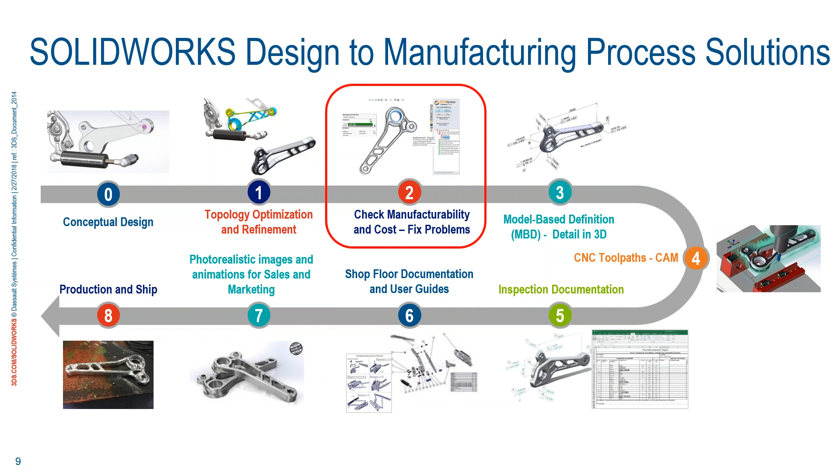So today, though, we're going to focus mainly in this area, checking manufacturability, cost, and fixing manufacturing problems on your part. So tools that help you to do this. So let's get right into first, why is DFM important? So DFM, Design for Manufacturing tools, let you check manufacturability of your product. So you can design products that are less costly, better quality, and you can get there faster. Also, it helps you to catch manufacturing problems early so you can fix them in the design phase where it's cheaper, before it gets to manufacturing, or even worse, if it gets out to the customer.

Third, it improves communication between design and manufacturing. So rather than just throwing it over the fence to manufacturing, now you have direct manufacturing input as you're designing. And fourth, it captures best manufacturing practices so that designers, people who are building the parts, can actually see the information real time as they're designing the part. So the feedback is instantaneous.

So we're going to discuss a bunch of different products today, but we're going to mainly focus on two products, DFM Express, which is inside SolidWorks, and also DFMPro for SolidWorks, which is actually a partner product. So let's start with DFM Express. So DFM Express is included with all SolidWorks licenses today, all right?

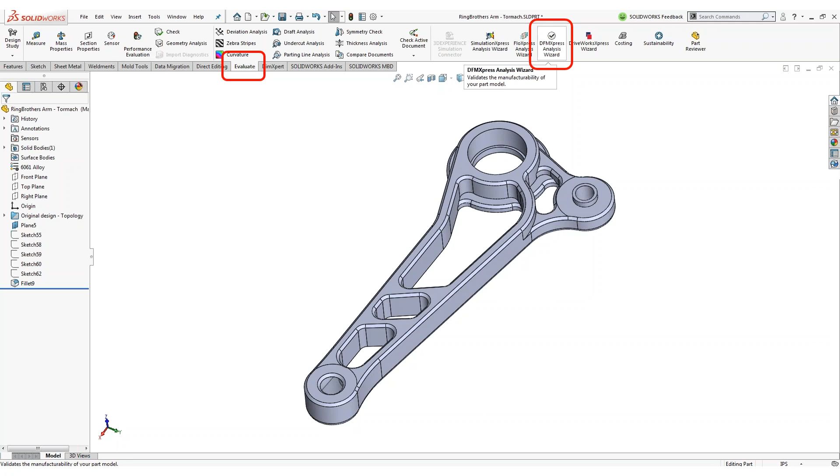And the way you access it is if you're on the Command Manager, you see the Evaluate tab, and you would see DFM Express Analysis Wizard. The other way you can get there is by Tools, Express Products, DFM Express. Now, one thing that came up in the first session, you have to be in part mode to do this, all right? This is something that we analyze parts. So if you're in assembly mode or if there's nothing on the screen, you're not going to be able to see the DFMXpress selections. All right, so that's how you get there.

So DFM Express, when you fire it up, this is what it looks like. It fires up in the task pane. And the first thing you want to do is go to Settings. So under Settings, you can select what process you want to use, and you can modify the settings for those specific processes. So mill drill or mill turn or sheet metal or injection molding. These are all the processes that are available in DFM Express. Each one of them has settings that you can modify on the side here.

Now these settings are in the software. They're sticky, but you can't save them and let somebody else use them. They're just for your use. In other words, you set the value and it stays sticky. The next time you open the file, those same values are in there, all right?

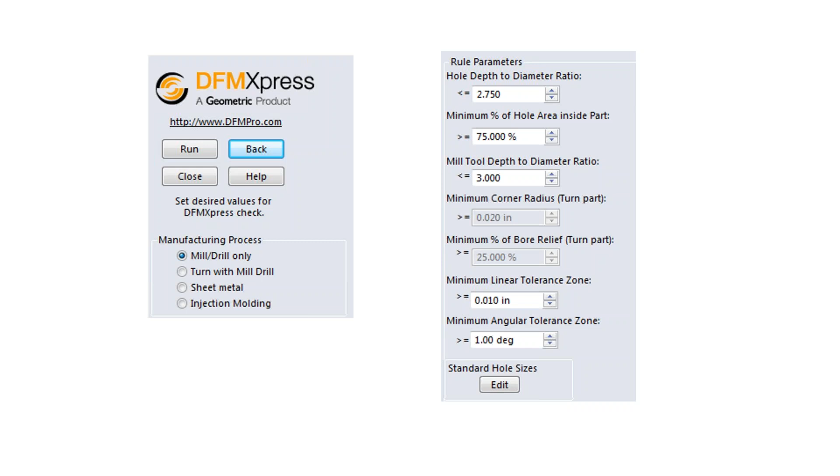So now when you want to run the software, hit the run button after you do your settings, and what comes out as a result is basically a set of rules that get checked, all right? If the rules show up in green, you're good to go. That means your part passed. If you see red X's, that means these are things you should investigate. Now, it might not be something wrong with your part. It's just giving you a warning that it's advising you, hey, you may not want to do this, or this is not advisable to do this.

So for instance here, I had fillets on the outside of my part, on the outside edge. Now I'm milling this part. So I know if I'm milling that part and I've got fillets on the outside, it's going to take a little while longer to mill a fillet than it is just to either leave a sharp edge or to machine a chamfer, which would be like one pass, okay? So it's giving you recommendations. Hey, there might be a better way to do this. You've got fillets on the outside. They can be difficult to manufacture, which means they could be costly.

So there were a lot of other checks that it ran. For instance, it ran checks on standard hole sizes. That's very common. Hole depth to diameter of cutting tools. That's a common thing. You don't want your cutting tools to be very skinny and to be going deep because they might break off or they might wander inside the part. And there are other checks such as, are the features machinable? Can they be reached to be machined?

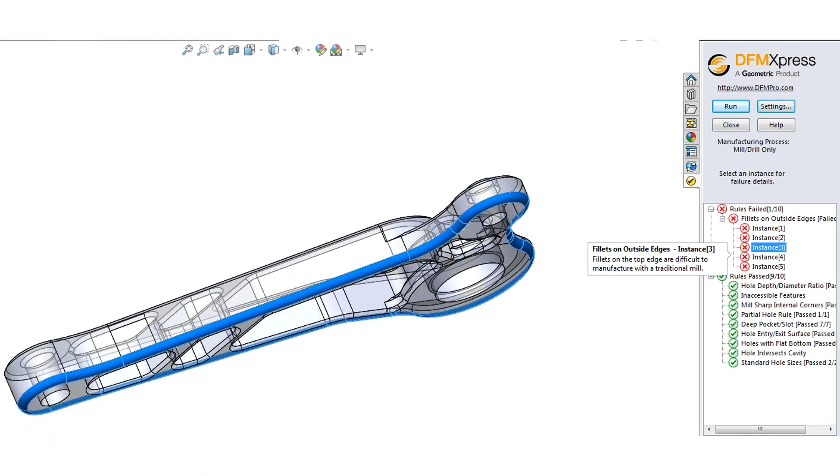So there's all these checks, it's kind of like spell checker or a grammar checker for Word, right? So it's a very easy to use tool. It's very easy to set it up. And it's just a great way to check your part before you go to manufacturing. Now, there is a more sophisticated product with more types of analyses, more collaboration tools that come with it. That product is called DFM Pro for SolidWorks, and that's actually offered by one of our partners, HCL. So with that, I'm going to let Pranav give a little talk about DFM Pro for SolidWorks.

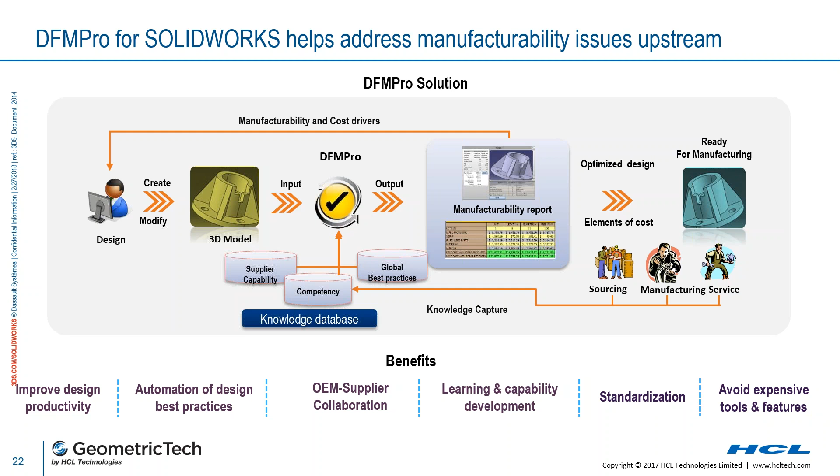Next slide, Craig. So what does DFM Pro contain? As we have seen, DFM Express has a few rules for mill turn, sheet metal, and injection molding. DFM Pro expands the scope of DFM Express and takes it to another level where you get access to hundreds of DFM rules for various processes like injection molding, sheet metal, and assembly.

You can perform various assembly checks, casting, machining. It can also perform additive manufacturing analysis, then turning, welding, tubing, and so on. So all the common, typically used manufacturing processes are supported with DFM Pro. Next slide, Craig.

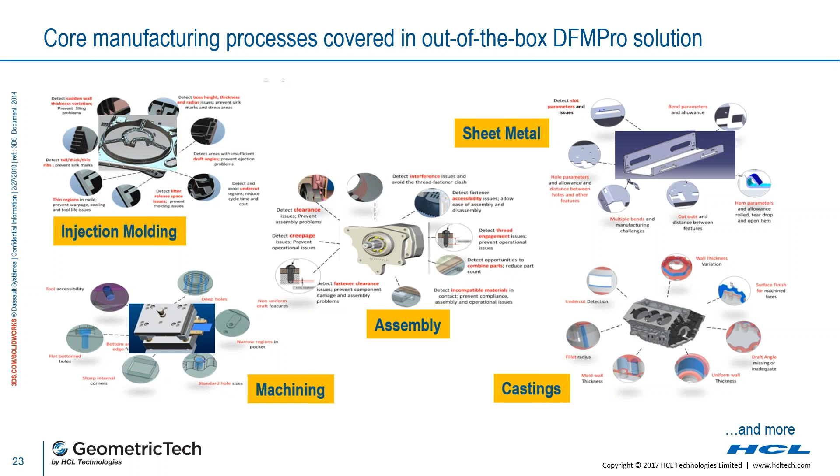Now you get the recommendations inside SolidWorks. And again, these recommendations are just there as an assistant to the designer. You have no obligation to make the changes as per the recommendations, because many times your design features are required from a functional point of view. But DFM highlights them anyway from a manufacturability aspect.

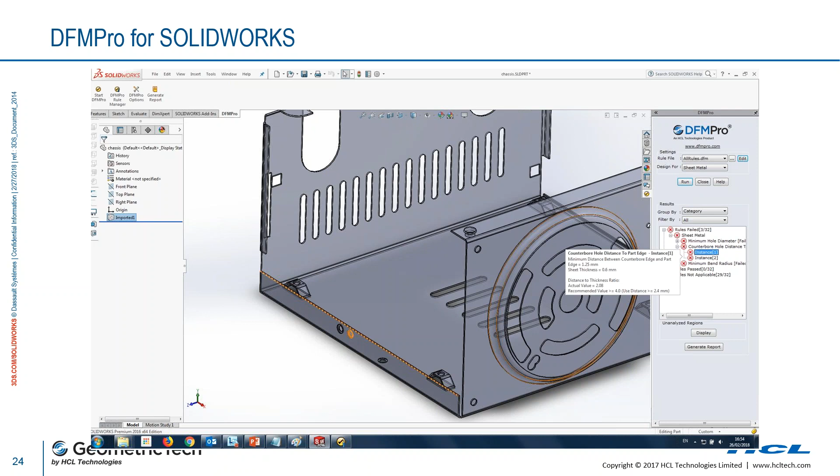So the framework of DFM Pro, as I mentioned earlier, takes it to another level where you have access to a DFM Pro rule manager, which lists all the manufacturability rules. You get access to 100+ rules, and you can configure all those rules based on your capabilities and the downstream manufacturing capabilities of different teams.

Once you have configured all the rules, you can create multiple templates and save them in a central location, which can be accessed by all your different teams. Now, these templates can be supplier specific, product specific, program specific, or material specific. It depends on the specific requirements of your project or company. Next slide, please.

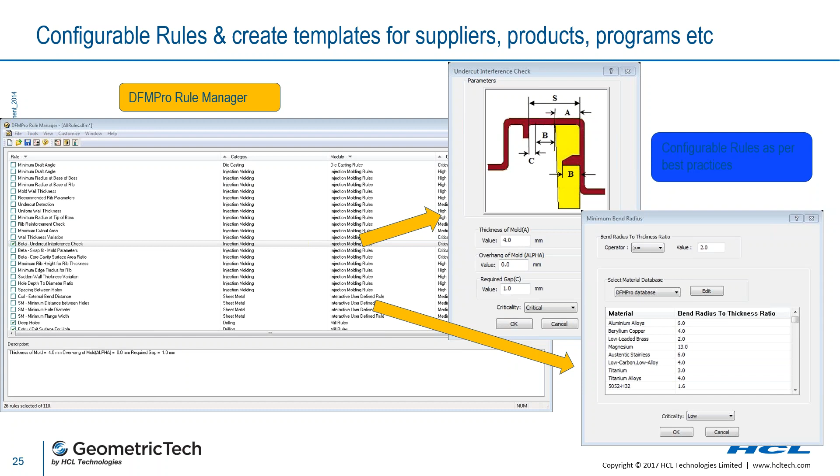Now, it's all well and good if you create a good design, but if you want to communicate certain aspects of it, you need some powerful reporting tools. And that's where DFM Pro helps you create those reports for quick collaboration between different teams.

You get access to an Excel report, which has all the automatic images embedded in it, done during the analysis. You have access to an eDrawings report, which is again a SolidWorks product, but herein you get a viewer where you can quickly view the model in 3D format. You can collaborate by adding annotations and comments to the 3D model and sending it back to the designer who is creating it. So if you're taking a quick design review feedback from somebody downstream, they can have eDrawings enabled on their side instead of having a CAD license.

And then you have the XML report, which typically comes in handy if you want to process your reports for historical references in future inside your PLM systems.

One thing I want to bring out is if you're a manufacturer and you get parts and you want to communicate back to your designer or customer what is wrong with the part, if these corrections would make it easier to manufacture, or maybe there's a problem where you can't manufacture something, what a great way to communicate back to your customer: an eDrawing or an Excel report or an XML with images in those reports, rather than getting on the phone and saying 'hey, that knob next to that other thing?' So this is a great tool for feeding back what's wrong with your part. If you made these fixes, I could either machine it faster, cheaper, or at all.

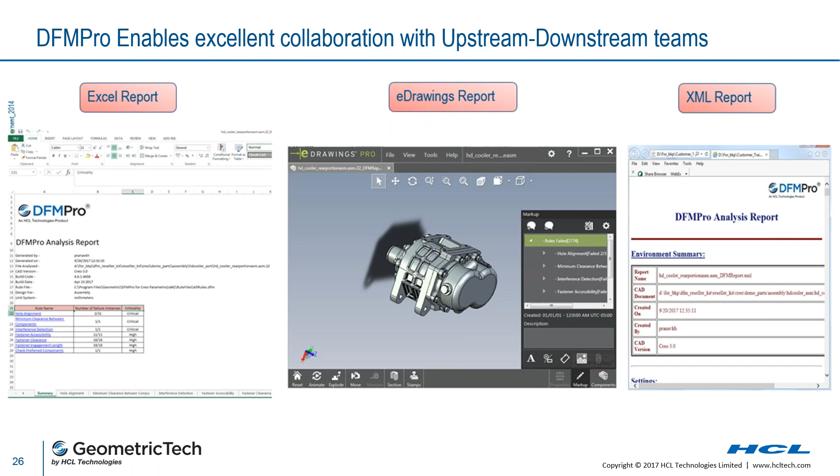So in a nutshell, what have we seen so far? We've seen DFMXpress, which Craig showed, which comes packaged out of the box with SolidWorks. You can activate it with a code, which you can get from the website. It basically includes all the DFM checks, or a limited number of DFM checks, for sheet metal, mill drill, and injection molding modules. It's a great way of quickly validating your design on your client side.

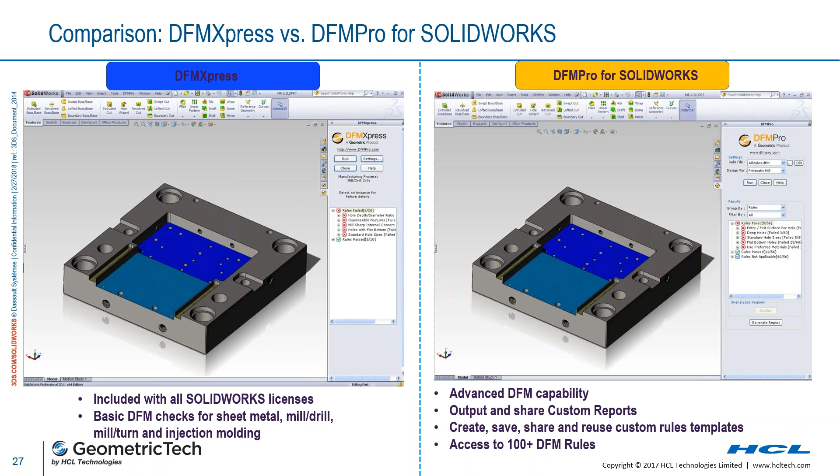Whereas DFM Pro for SolidWorks is more of an advanced capability of manufacturability validation, where you can output your design reports, share custom reports, and get access to 100+ templates or rules, which can be tailor-made specific to your design process. You get access to other rules like assembly and so on, which you would like to perform in various scenarios. So to get more information about DFM Pro for SolidWorks, this is the link.

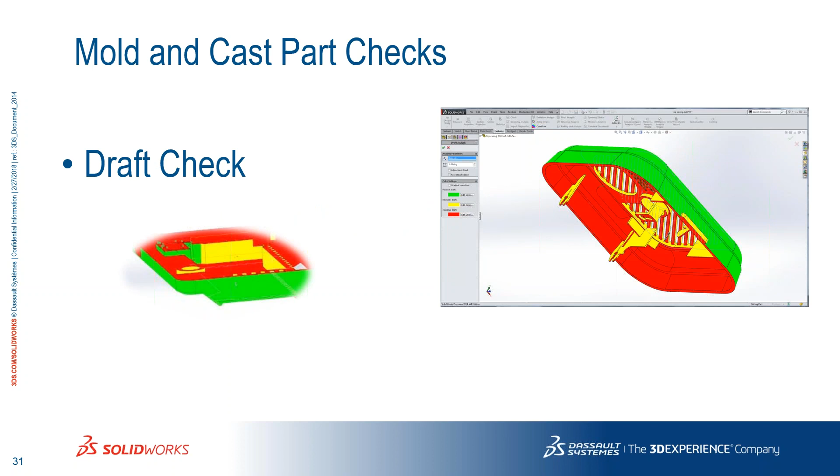So for mold and cast parts, draft check, undercut check, and also thickness check are available under the Evaluate tab. Now for more advanced mold design capabilities and plastic part design, there is SolidWorks Plastics Professional, which is mainly for part designers: will my part fill? Where are the weld lines? Are there air traps in my part? More about how it affects the design of my part.

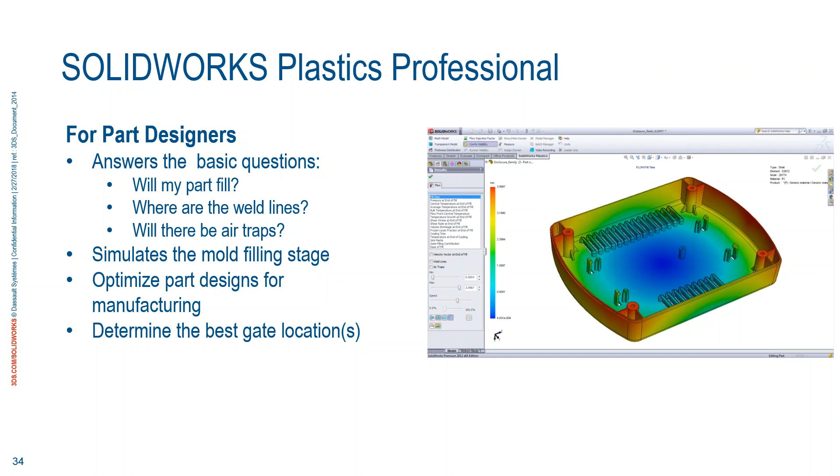And then on the other side, mold makers and mold designers, people who want to do insert over-molding, two-shot molding, want to evaluate gating, things like that.

A more advanced package, SolidWorks Plastics Premium for them.

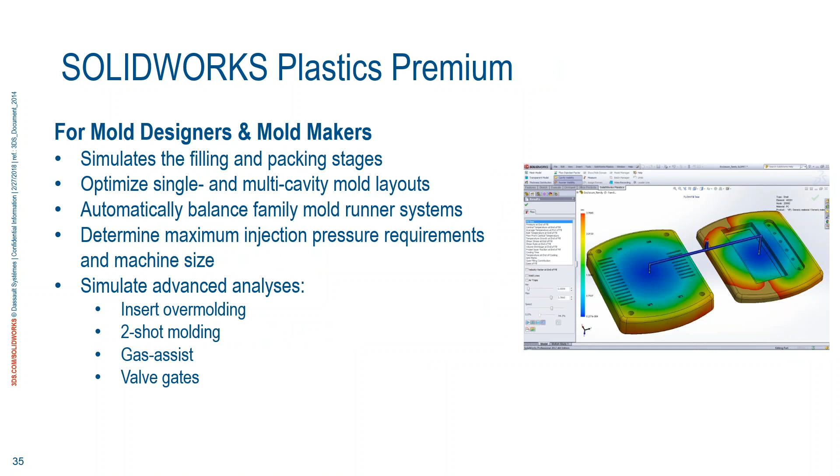Now, when you go to create toolpaths, sometimes you have to really worry about your geometry. Is it clean? Can I machine this? So sometimes you want to check your part for small faces, sliver surfaces, knife edges, things that might cause problems when you go to manufacturing. A good check for that is Geometry Check, also under the Evaluate tab in the command manager.

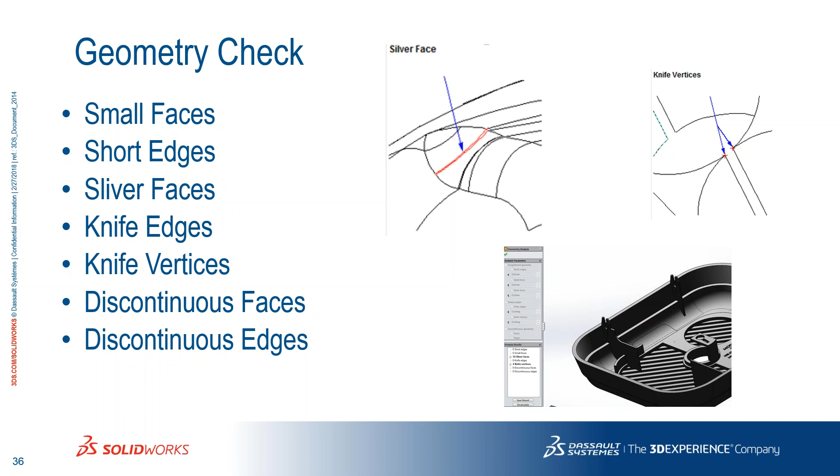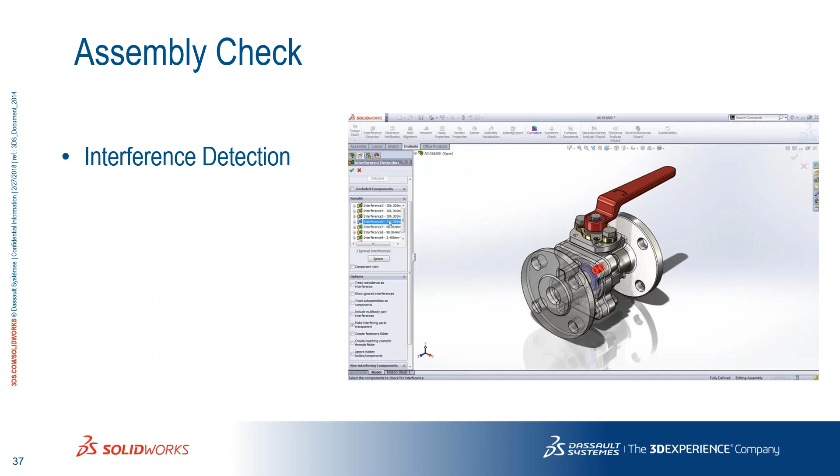Assembly checks, so interference detection, people are familiar with that. A lot more functionality has been added to it over the years, so I recommend people revisit interference checking if they haven't delved into it in a while.

Hole alignment: make sure that if you've got holes that have to align to put bolts through, this is a great check. It even picks up those very small misalignments.

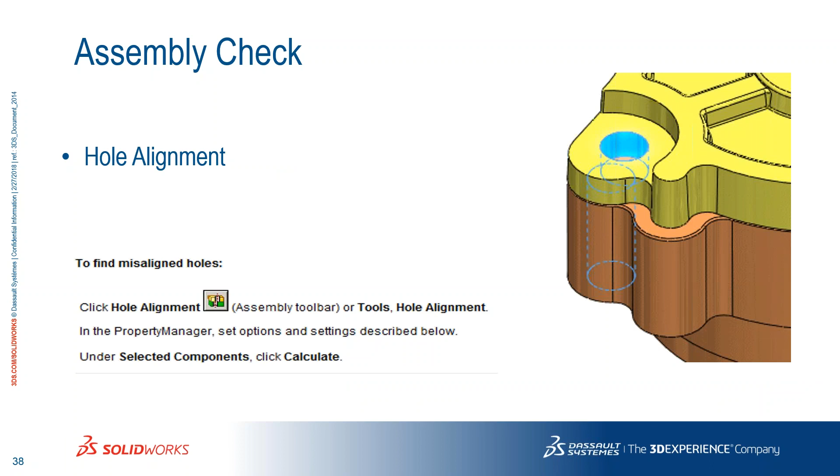Tolerance analysis: when you have parts that have to be toleranced, you want to make sure those parts are going to assemble and stack up properly. TolAnalyst is part of SolidWorks Professional now. By the way, the way you launch it is Tools, Add-ins, and you add TolAnalyst. That's how you actually see it.

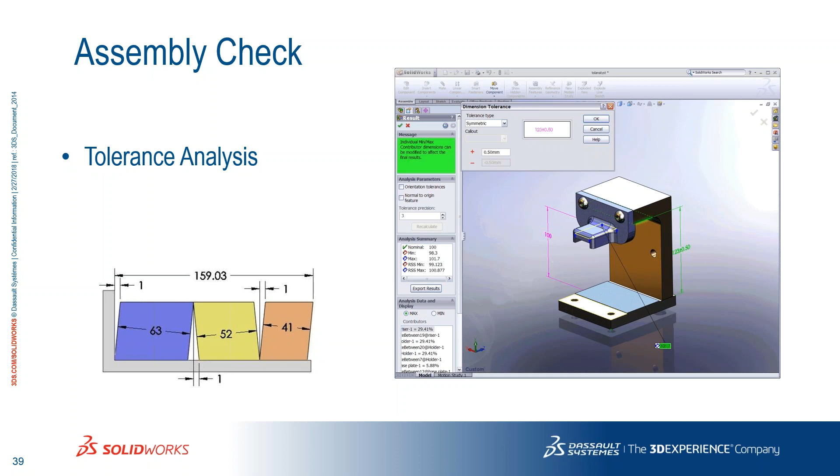Then in SolidWorks 2018, we launched SolidWorks CAM, and there are two packages: SolidWorks CAM Standard, which is included with all SolidWorks licenses that have an active subscription. So if you have SolidWorks Standard with an active subscription, you have access to SolidWorks CAM Standard. And there's also SolidWorks CAM Professional.

The great thing about SolidWorks CAM products is that they're what we call rules-based manufacturing. So instead of having to pick a face and pick a tool every time and set up an operation, this software will actually go in, look at your part, and recognize manufacturing features like holes, profiles, and pockets, pre-creating all those operations for you. You can go in and edit them, change them, and save favorites. When you save exactly the way you want a certain operation performed, you can save it back and change the rules very quickly. We like to call it a learning system, because it's very easy to change the way that it thinks.

So SolidWorks CAM makes CAM programming a lot faster than traditional 3D CAM programming. By the way, with SolidWorks CAM, you also get outputs like operations, tools used, and time on the machine. So it's a great way to get a very accurate time estimate on the machine.

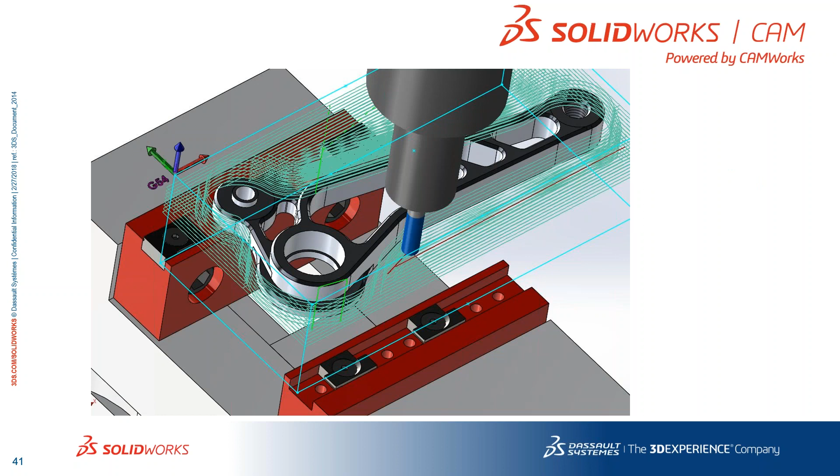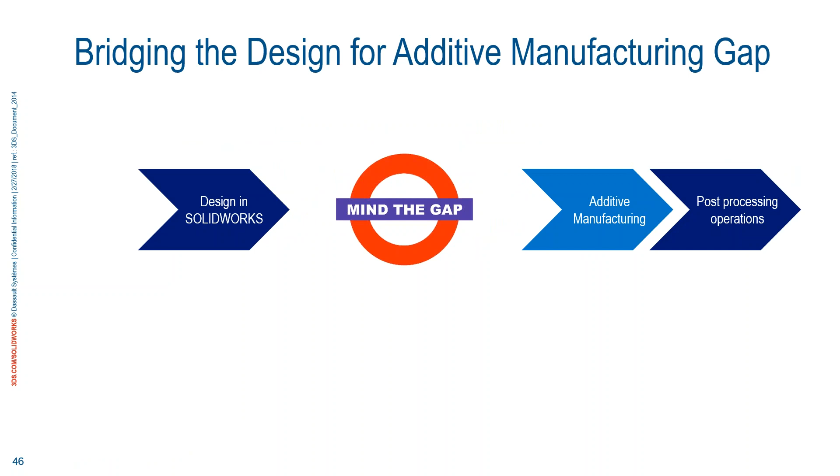3DXpert for SolidWorks was announced at SolidWorks World this year. It kind of bridges the gap. It's a free plugin from SolidWorks that bridges the gap between the design of the part and going to the 3D printer. Think of all the stuff that happens in between: you want to set the part up, know if it fits in the work envelope of the machine, where the supports are going to be added, prep the part, and see the actual mesh geometry of the part. All that can be done with 3DXpert for SolidWorks, so check out that plugin on the SolidWorks website.

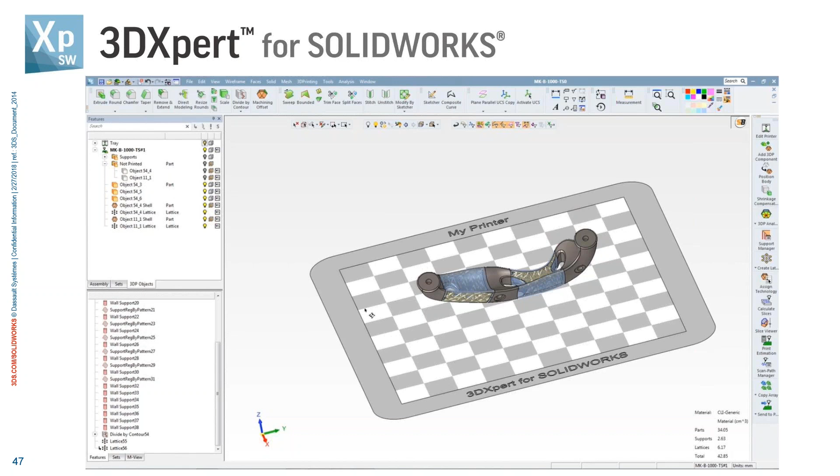Costing has been around since 2012. Every year we've added new processes. Now we have assemblies, and in 2018, you can now cost actual assembly operations, which is really neat. So check out SolidWorks Costing: bring up a part, bring up an assembly, hit the button, and get an instant cost.

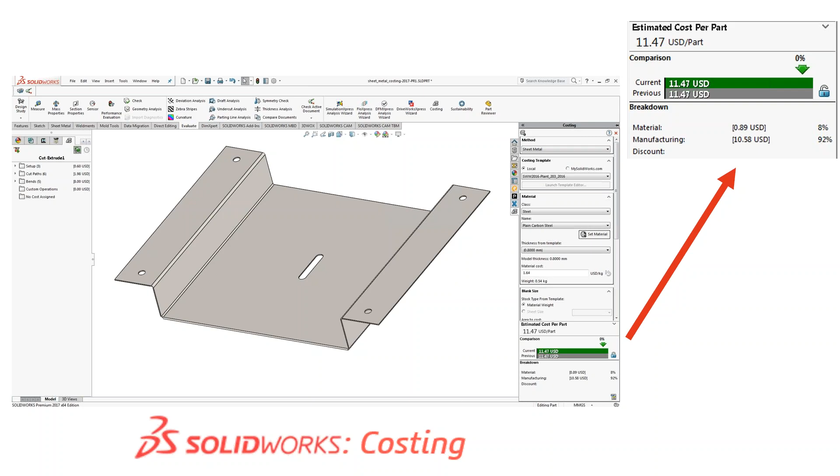We also announced at SolidWorks World the 3D Experience Marketplace Make. It's a place where designers can find manufacturers, think of it that way. But you can also get automatic quotes for parts. Right now you can go and get quotes for 3D printed parts, and you can also connect with people for fabricating and machining, injection molding, and other processes as well. So that's 3D Experience Marketplace Make.

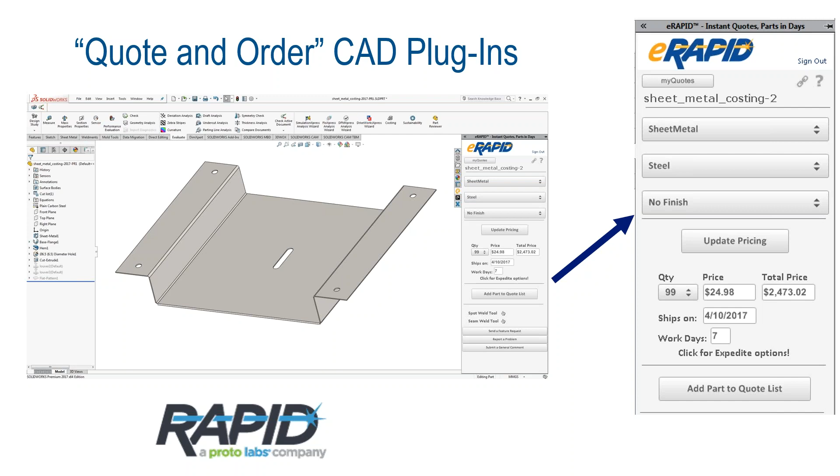I'd like to talk about some great plugins from our partners. eRapid, now a Proto Labs company, has a plugin for SolidWorks for costing sheet metal parts directly in SolidWorks, so you get a cost and a delivery. Xometry is similar, doing 3D printing, machining, and many other processes, as well as Plethora, which is more focused on CNC machining. All these companies have plugins that let you directly cost the part, get a delivery, and actually order the part from SolidWorks. Pretty cool.

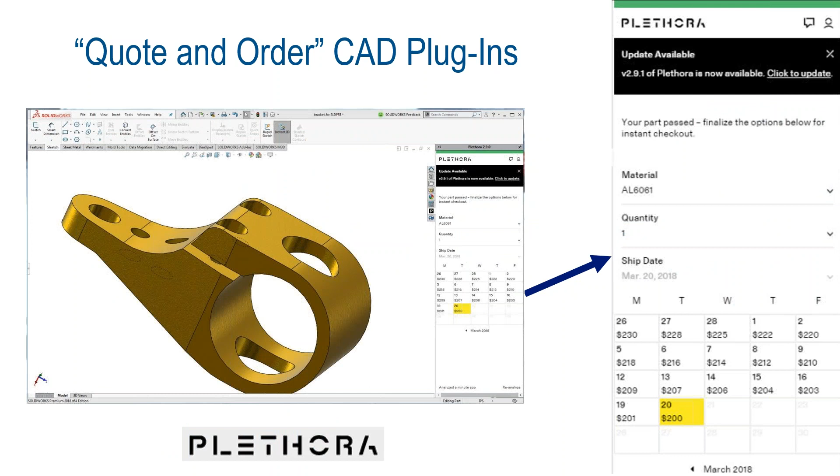So let's summarize. DFM is important because it helps you design less costly and better quality parts faster. It helps you catch and fix problems early in the design cycle, where it's cheaper to make those fixes. It improves communication between design and manufacturing because you get manufacturing information while you're designing, and you're able to see the best practices your manufacturing people want you to know about directly in the software. You can check it like spell checker or grammar checking.